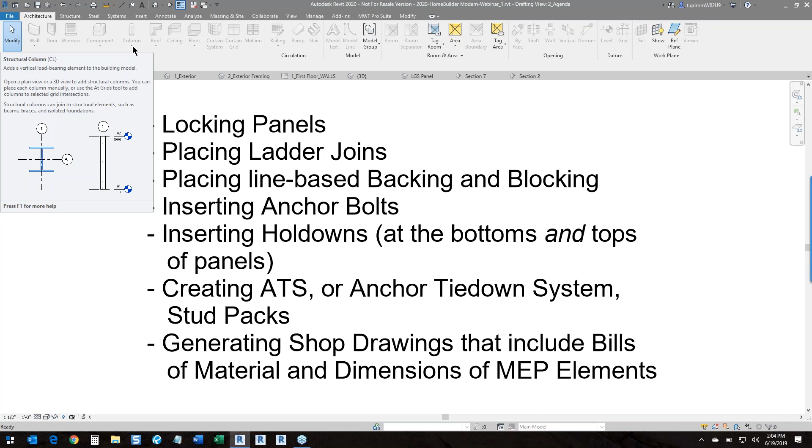Now let's get to the heart of the presentation. As I mentioned, I'll start with locking panels, which is a new feature.

I'm going to select this panel here, switch to our wall model, and under settings, I can select lock panel. I'll be prompted for a description, and I'll type 'panel has been fabricated', and click OK.

Note that the wall shows up red in the floor plan. If I view it in 3D with a section box, you'll see it also shows up red in the 3D model.

You or another user can then come in, select a member in the panel, go back to settings, and select unlock panel.

We've also added a feature that allows you to track the lock status. So I'll click on this. Currently the panel is unlocked, but if I expand this item, I can see if it was locked, when, by whom, the comment, and probably more important, who unlocked it. Because if you lock a panel, you probably did it for a reason, so this way you can see who unlocked it and go talk to them if need be.

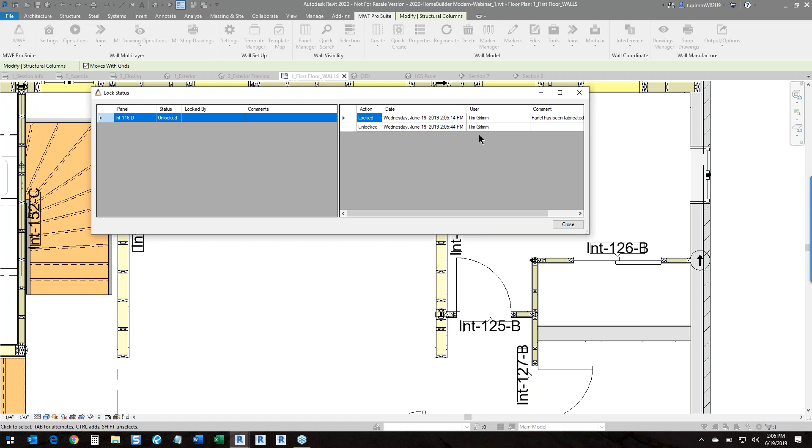So that covers locking panels. That is a new feature. It applies to both wood and metal.

Next, I'll place ladder joins. I'm going to place a couple over in this area. Here I'll place a 2x4 ladder join, and here I'll place a 2x6 ladder join.

To place the ladder, we first select two studs on either side of the other wall. This is a type of join, so it's going to be under joins. Place ladder.

Here I'll give it a name. This is going to be my 2x4 ladder. For the family, I'll choose 2x4. I'll toggle on select intersecting wall. What that's going to do is it will truncate this wall back.

We do have a couple options here. Finish will insert a layer of finished material in between the last stud and the ladder. Structural will not. I'm going to go with the structural option.

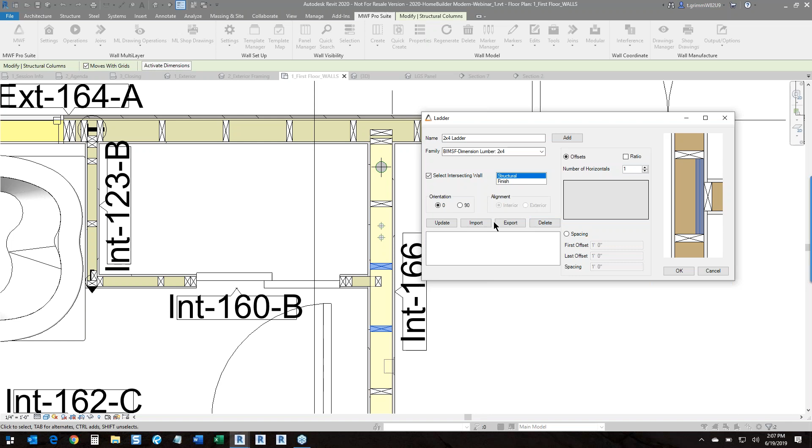For orientation, if I click on 90, you'll see that that's the type of ladder we might use to get from one level to another. So we want to set that to 0 so that our members are vertical.

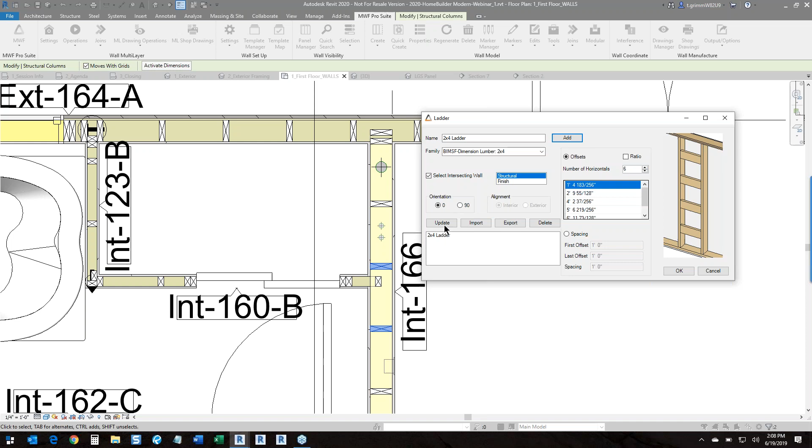We do have some spacing options over here. You can explicitly specify what the spacing is between the members. I'm not going to do that—I'll simply leave it set to the default, which is offsets. And I'm going to indicate that I want 6 members in my ladder. I'll click Add. That creates a saved configuration. And I'll click OK.

Now I'm being prompted to select the intersecting wall. MWF will place the ladder and truncate that wall back.

I'll place one more over here. Again, I select the 2 vertical studs, go to Joins, Place Ladder. This time it'll be a little bit easier - I'll pick the 2x4 ladder configuration and simply modify it.

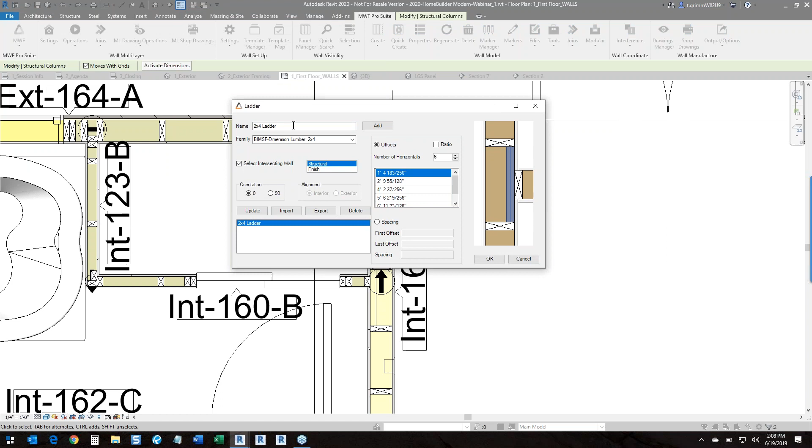So this is going to be a 2x6 ladder. I want this to be the 2x6 family, and I'll change the number of members from 6 to 5. I'll then add that configuration.

Click OK. It wants the intersecting wall. MWF places the ladder and truncates the wall back.

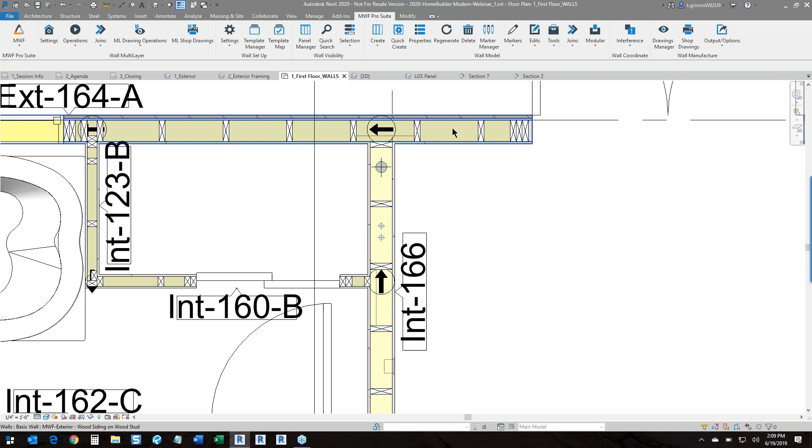Let's take a look at these in 3D. I'll create a section box. And this is the 2x6 ladder. The 2x4 ladder is here behind.

If you want to delete a ladder after the fact, you can simply select a ladder member and under Joins, Delete Ladder.

If I go back to the floor plan and select a member of this panel and regenerate it, you'll see that the wall stays truncated because there's still a join there at that intersection.

So that is placing ladder joins. This is a new feature. It applies to wood. Next, we'll take a look at line-based blocking and backing.

For this, I'm going to switch to a file that contains a light gauge steel panel. And I'm simply going to select one of the panel members and create a marker line.

I'm going to use the regular spacing option, and I want to assign blocking. For the offset, my wall is 10 feet tall, so I'm going to go ahead and set this to half of that, which is 5. And then I only want 1, so I'm going to set this number to a big number, so I don't get a second line.